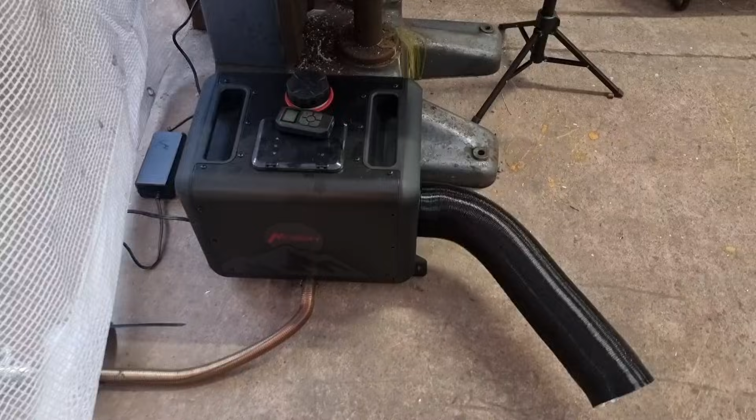Time for another Banggood Hcalory diesel heater review. Regular readers will see that I have received, reviewed and installed the toolbox Hcalory toolbox. I think it's their biggest, top of the line, all bells and whistles, comes with an app. You can remove the control panel and have it mounted on an extension cord remotely. And all that, and it is absolutely on point.

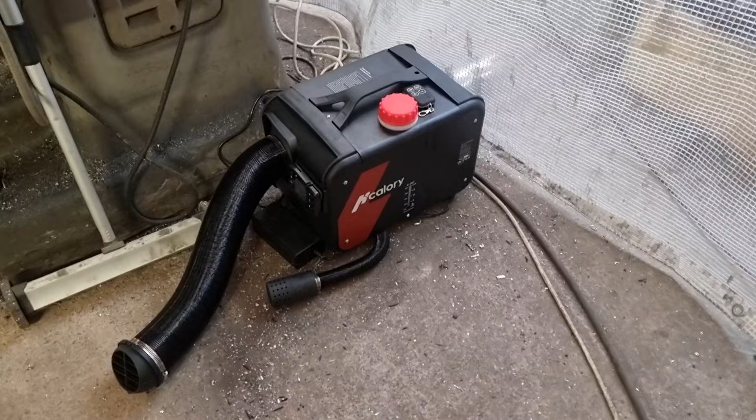Shortly after receiving and reviewing that, they reached out again and sent me its little baby cousin or brother or sister, the smaller one, the next one down. There are a few differences, but nothing major. Let's run through what you get, how you set it up, and how well it works.

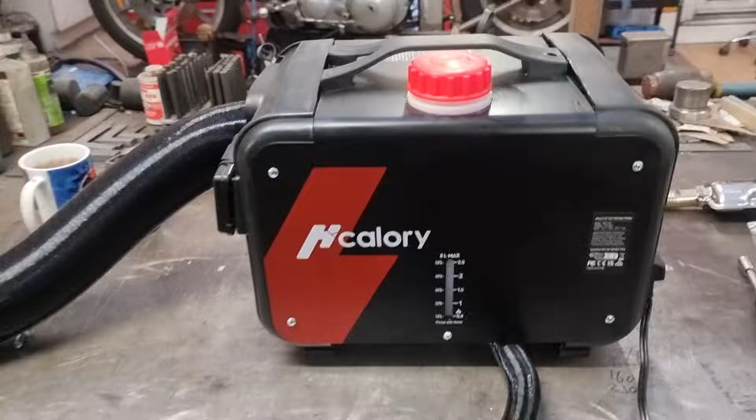I'm not going to do an unboxing because I've been using it and testing it out, and I didn't film the unboxing because it's just me taking this out of a box. When it comes, you will get the unit itself.

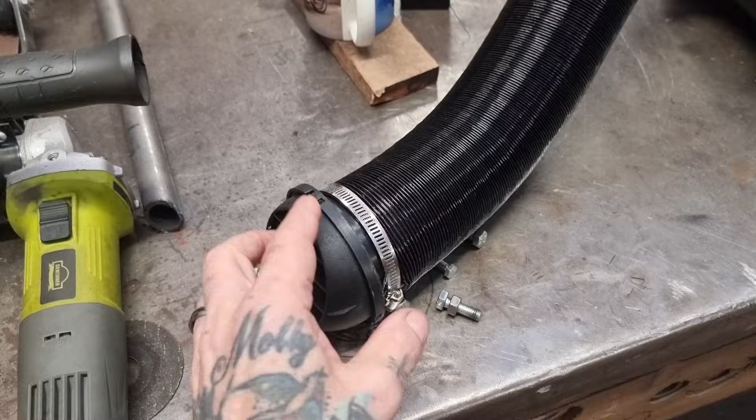There are 3 connections you need to make. One is the outlet, and you get the Jubilee clip for that, and you can direct this where you want. If you're running the unit outdoors, which you can do because it's fully waterproof, apparently - I don't run it outdoors, but it's fully waterproof - you can run this to a vent in the side of your van or your shed or your workshop or wherever, and then have the outlet blowing hot air out.

One is the air intake, which again comes with clips so you can clip it on. And the third one is the exhaust. I'll show you underneath, bear with. Let me just tip it up. So you get the 2 connectors that you need to make underneath.

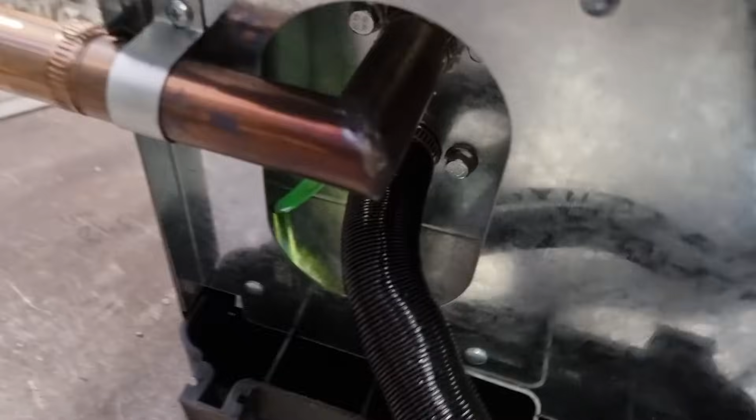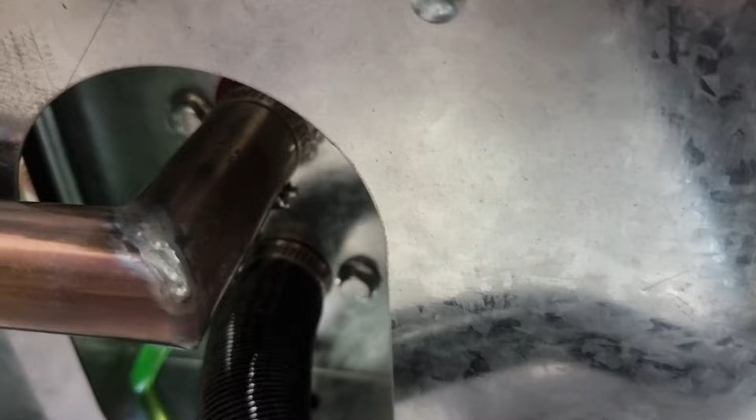Now this bottom one, the exhaust one, was not very tight after I'd tightened the clip up that you can't see very well, so I used a bit of exhaust paste on it - this stuff. I think that's really important if you're not running it outdoors. If you are, then not so important because the exhaust gases will just blow away.

The other one, the air one, just push it on, clamp it up, and it draws its clean air in for the combustion chamber through this tube, which again you should really run outside so it's not creating negative pressure in your workspace and drawing cold air in, but that doesn't apply to me. Honestly, that took 5 minutes, if that.

You get little feet to put on it, which I have put on it. They just clip into place and then screw up. And you get a 12-volt power supply, much like the other one, so you can run it on mains power.

Ignore the snake's wedding. You also get the remote control, ready to rock and roll. I believe, well I know, it's got a little round watch battery type thing in it. It's not rechargeable like it is on its big brother, that's USB rechargeable. This is not, but it controls the unit perfectly.

You also get an extension cable, a power cable, so you can run it off a 12-volt supply - that's in your vehicle or a separate battery that you recharge as needed, if you've not got access to 240-volt because you're running it in a vehicle or you've not got it where you are.

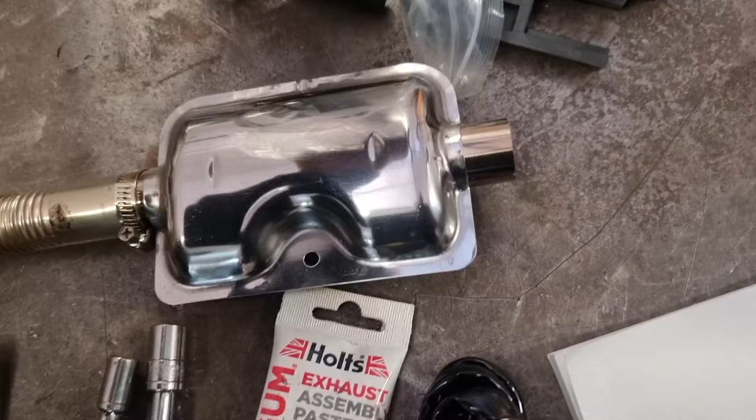And you get a few other bits and bobs that could be useful, could not, depending on where you're siting it. You get these brackets that shove on where I've put those little feet, and then you can bolt it down to a deck or a surface or a shelf or a wall or whatever you're doing with it.

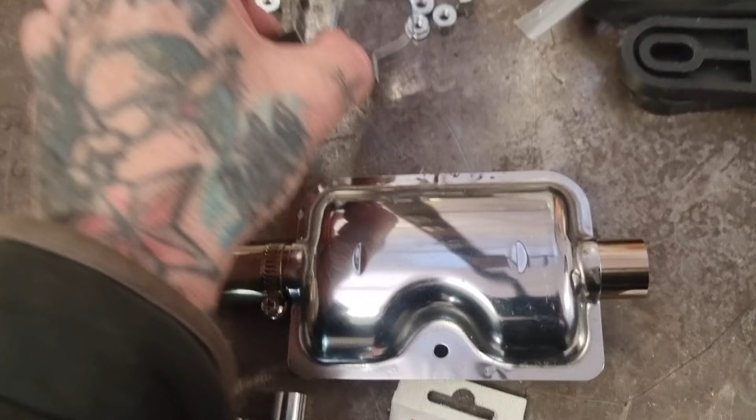Via these bolts, you get a few other bits and bobs. You get extra bits for the pipe work, the ones I've just shown you, so you can clamp that up away from a surface because it gets ridiculously warm. Bear that in mind.

Some people salvage the heat from the exhaust. Not something I've bothered to do. For my application, I just want rid of the noxious gases and the job's a fish. But you can clamp this to the side of the wall or wherever it's running to make sure that it's not getting near anything combustible or damageable.

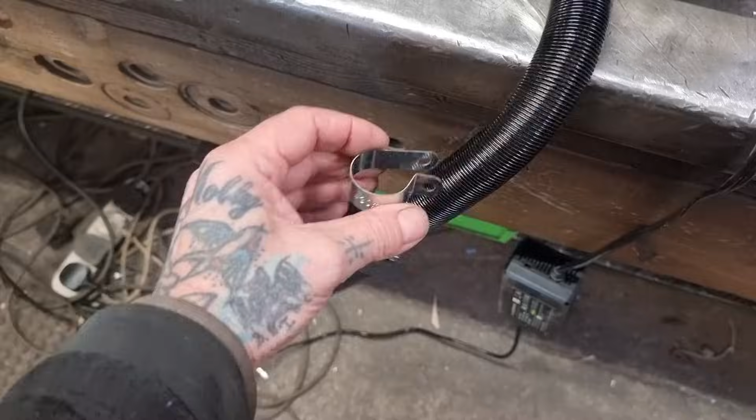And the same with the air intake. You get a clip for the air intake, so you can route this where you want it. You can stand it up there and it will all be happy days.

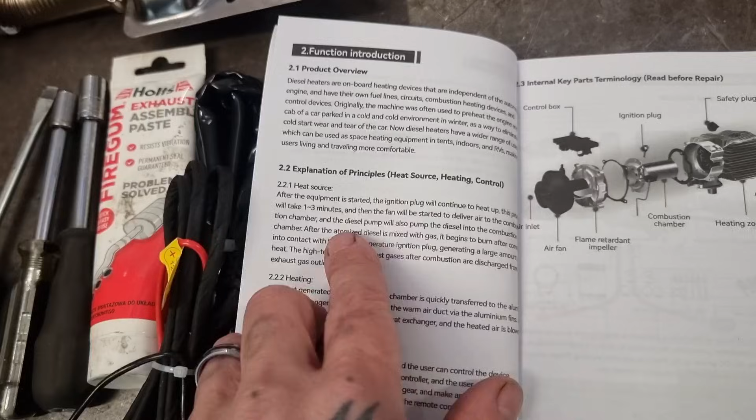And of course you get a really thick manual. Now it's in lots of languages, so the English section is nowhere near as thick as the book would suggest. To be fair, I've not read it because it is so simple to use. This is the first time I've looked at it. So it explains what the thing is and how it works, and it gives you an exploded view of the heart of the beast, the actual burner and the heating bit.

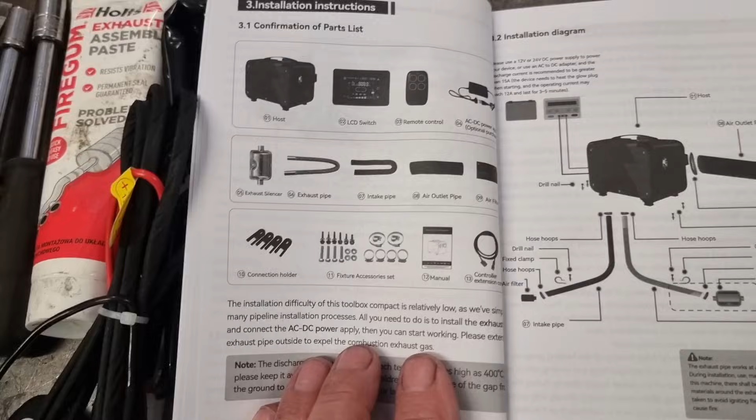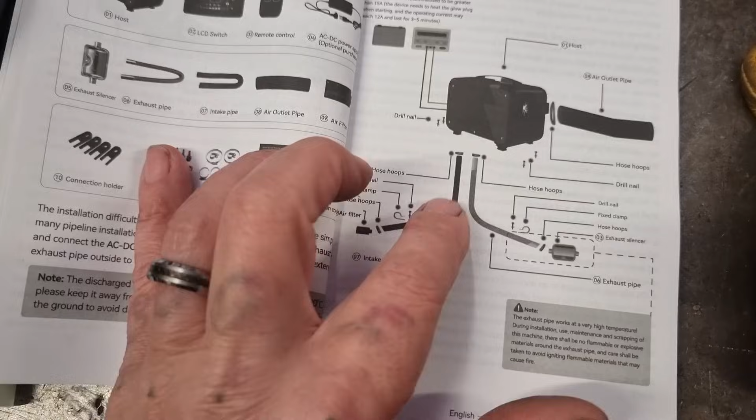You get a list of the parts that you should have received when you opened it, which I did. I got everything there, and then it shows you those connections that you need to make. You need to be sure that you don't get these mixed up, because that would be a bad day. You would burn the intake if you tried to run the exhaust through it. It is only a thin aluminium flexi pipe, and it'd last about a minute. So be aware of that.

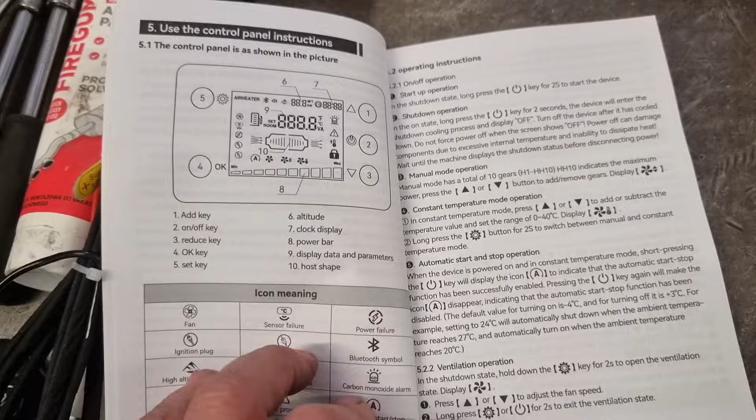And then you get a bit of safety stuff and the basic instructions about how to use the control panel and all the rest of it. Honestly, it is so simple, it's just a breeze.

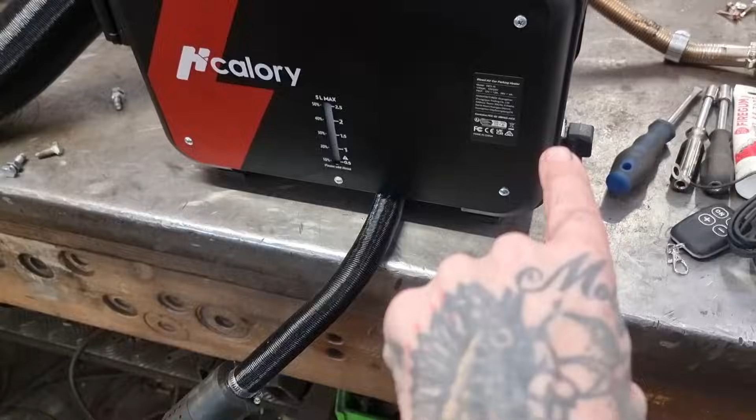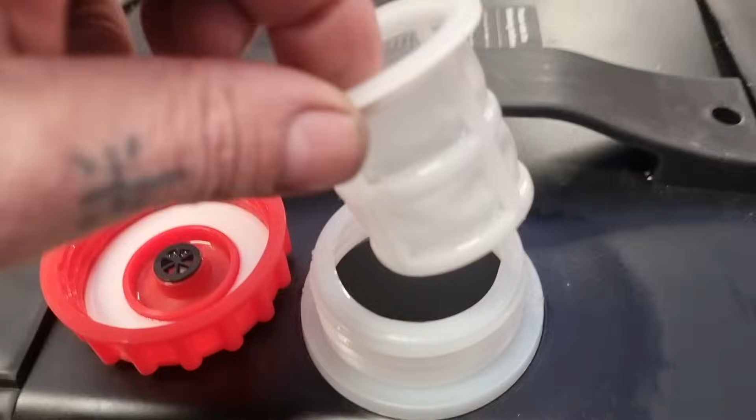All I did was connect the 3 hoses as I've just shown, plug it in, plug that in the outlet, so you're running electricity to it, and then it says 5 litre max, and I've got 5 litres in it now, but it only indicates from half full down, so bear in mind with that. It's got a massive fill port, so you can use your jerry can like I did and not splosh it too much. And it's got a handy dandy filter in there to stop you getting any debris in which might clog the fuel pump, which would be an inconvenience.

So connect your 3 hoses, plug it in, put fuel in it, site it where you want it. I'm going to run it up on the bench. Use your remote. Now, it is this simple. Press on, watch that control panel. So we'll press on.

It starts to fire up. Yep, there's the fans running, but it's not actually burning yet. It has to go through a very, very quick, I think it's a 4-minute start cycle before it actually starts burning properly and producing heat out of the outlet. But we'll keep an eye on the exhaust once it gets running, and I will show you how clean this thing runs.

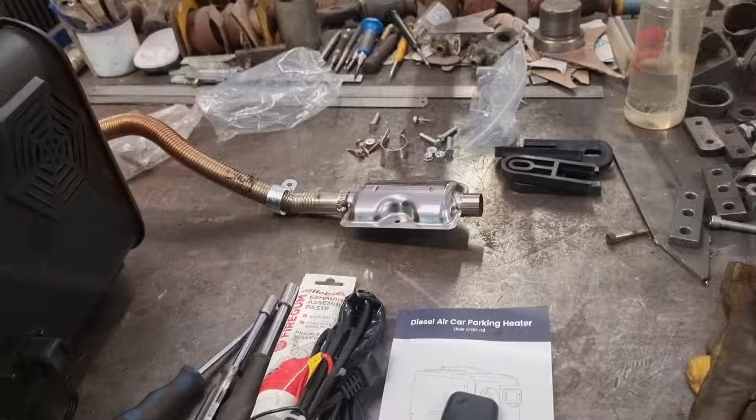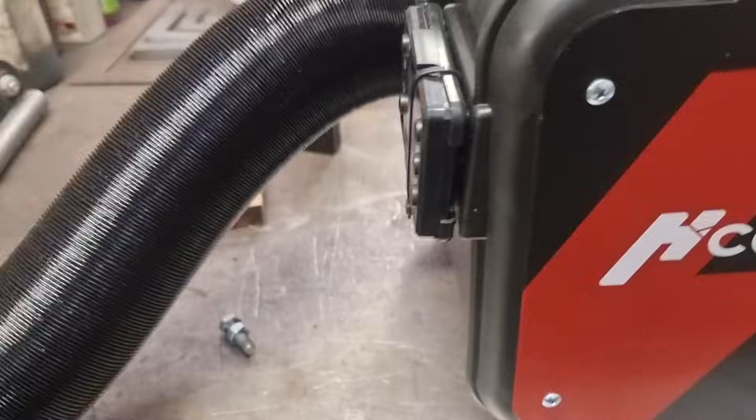Okay, now one of the critiques of these, especially the earlier ones, was how loud the fuel pump was. Now it's priming itself, getting ready to fire up now, so you can hear the fuel pump clicking. They use a diaphragm pump, and I think it started. I think it's firing up. It's not actually burning just yet.

But trust me, I've got my hearing aids in, and that ain't that loud. If I stand back a bit, it's not a problem. You could have that in your shed, in your workshop. It won't be too bad. It's not irritating, annoying, or invasive in any way whatsoever. And once it's up to temperature and running, then it barely clicks because it don't use a lot of fuel. Now, if you notice, it has actually started firing up.

Sounds like a little jet engine, but again, it's not very loud. If it was loud, I'd say. And that is just starting to come through a little bit warm, so it is now burning fuel.

And if we look at the exhaust, nothing. Just nothing. No smoke, no steam, no anything. Obviously there's carbon monoxide. I've got a monitor on the bench there, and the Big Brother comes with a monitor built in, so that might kick off because I'm running it right next to it. Not the best idea, but that's it going at full chat. And it is cleaner than Julie Andrews' memoirs. That is nothing coming out of there that's going to give you any worry, apart from the poison gas that you can't smell or see.

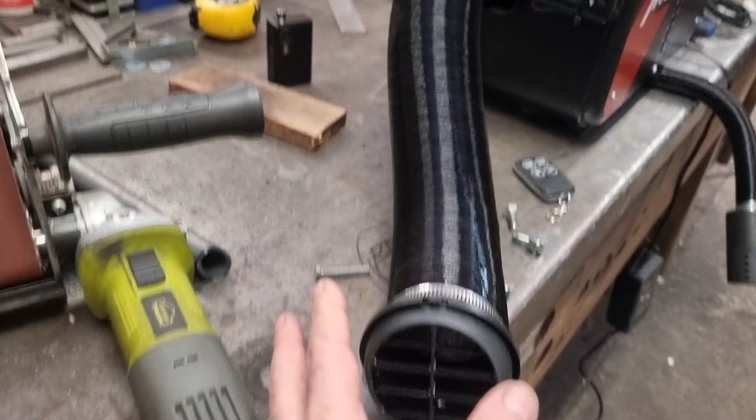And there you go, that is now running. Not quite red hot, it's certainly warming up. And looking at the timer on this video, this has been running for about 2 minutes. Right, we're another 30 seconds, maybe a minute max, and that's doing it. That is delivering the goods. So total startup time from cold to kicking out hot air is probably 4 minutes maximum.

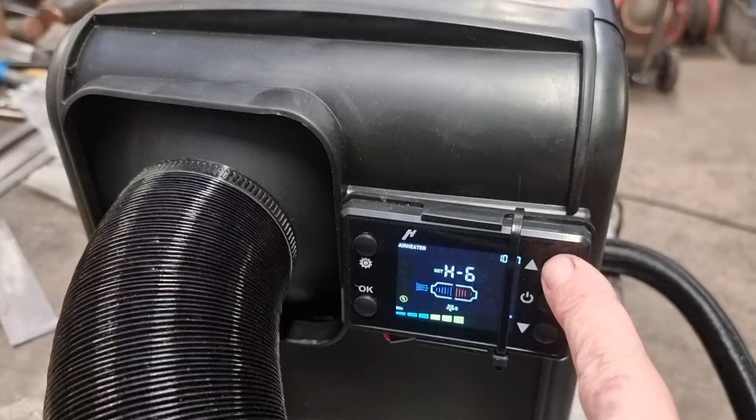There's a couple of ways that you can set it to run. Okay, so you've got manual, which we've got now, and you just turn it up or down using these buttons, the up and down buttons, or the same buttons on the remote. Look, I'll just turn that down, 7, 6, etc.

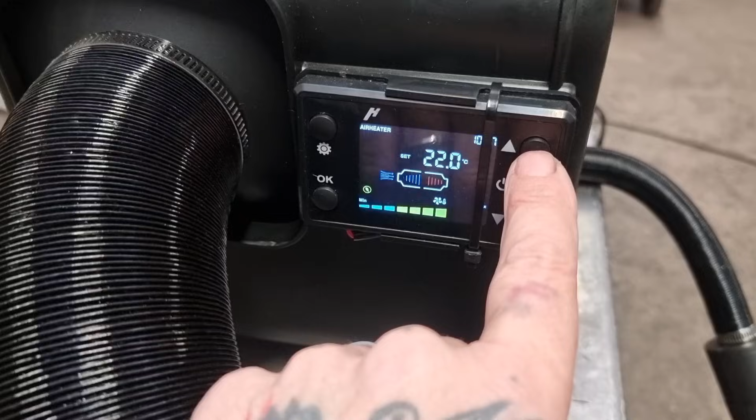Yep, no problem. What you can also do, because this unit, remember, you can mount it remotely in your room if this is outside. This control panel monitors the ambient temperature. So if you press and hold the gear button, it should shift it into ambient temperature mode. Again, using the up and down either on here or the remote, you set it to the room temperature that you desire, and it will go into low mode when it reaches it and high mode when it's not.

So there it is in full hammer. It is absolutely the cleanest running, apart from it's that big one over there. I had no idea that these things ran so clean. I'm not going to run it for very long in my enclosed workshop because I don't want to fall over. Safety is of the utmost importance when you're burning diesel as a fuel.

Okay, so to shut it off, if you want to shut it off, again, it couldn't be easier. You've got a big off button, yeah, or you press this button and hold it for a couple of seconds, like so, and there it goes into off mode. Now, because the element inside is still really hot, it's not going to just shut off. It has to run through a cycle. The fan keeps running until it cools down enough, and then it'll put itself properly to sleep.

Speaking of which, you can also have it in vent mode when it's turned off. If you press and hold that button, hold on, let me just check the instructions. Right, my bad, it's still closing down, look, it's still showing you that it's closing down. We'll wait for it to go fully to sleep, and I'll show you the second function.

It doesn't only blow hot air, you can have it purely as ventilation. It's quite a powerful little fan in there, so you can have it running without burning fuel, and it blows cold air for when it's hot. Now, I'm not sure if you can use the temperature room ambient setting for the cold air fan, whether the temperature rises above your threshold, it kicks in blowing cold air out or not. And I'm going to struggle to test that because it is cold air today, so I don't know.

But I'll wait until this has finished its cycle, and then I'll show you how to put it into fan only mode. Right, that is actually shut completely off now. It does take about 4 minutes again to close completely to shut down, so I can show you this mode.

There we go. That is now in air, not heat, so it's A, and you can control the fan with your up and down buttons, and it will blow out air as cold as it sucks in. Yeah, I think it will automatically just close down.

There are also screen brightness adjustments within this, and a clock and a timer.

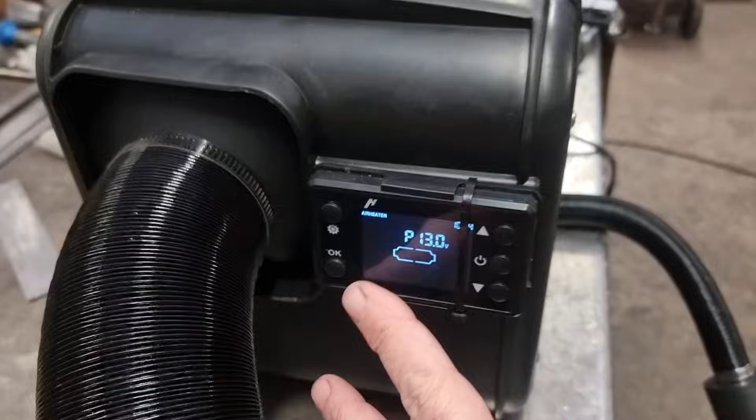Hold on, bear with me, there's an app, look, Hcalory app. Stop checking my home screen out. There we go. So when you get on the app, you can control it all.

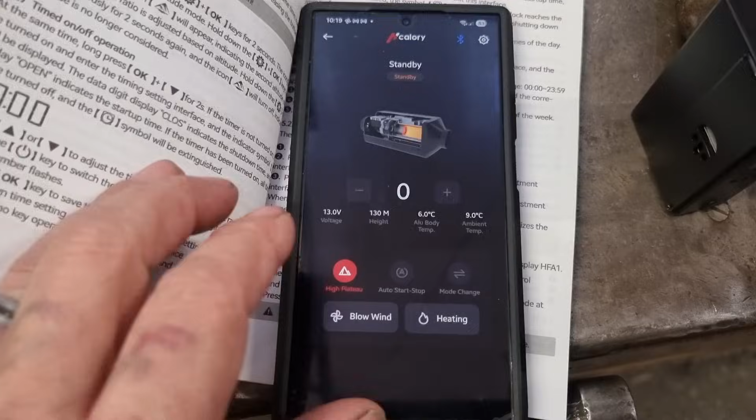You can blow wind, you can go into heating, and you can activate the device.

Oh, that's not a good one. It's done that one, look. I've connected to the wrong one. Hold on, let me just connect to the other one. See if I can get out of here. Right, that's the problem with having two. So we can't do that. We'll disconnect from the other one. Look, it's in standby. We've connected to that one.

We can blow wind, we can heating, and now this one should fire up. Hopefully, there you go. If you can hear it, that's fired up through the app. And there's lots more settings and controls within the app.

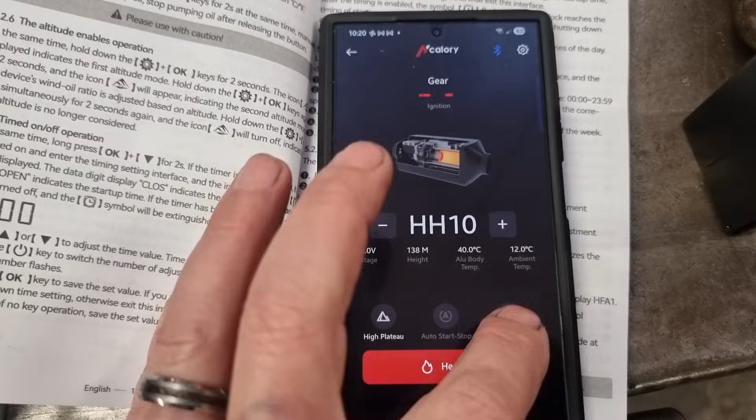Though you can absolutely use your phone, you can turn it up and down, you can put it into blow mode, you can do all sorts through the app itself.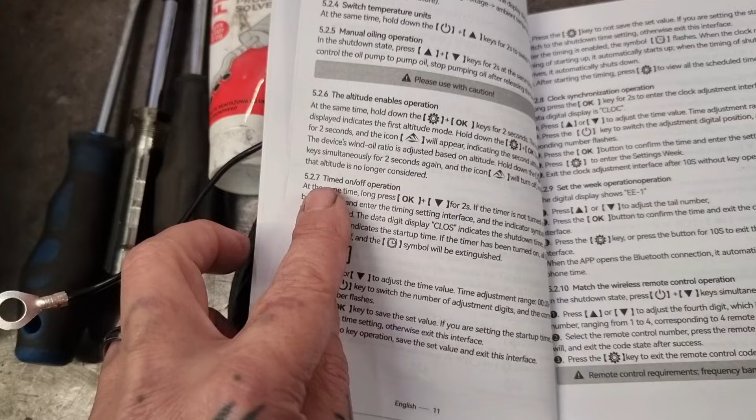Also, via that screen, you can set a timer. Look, there's a timed operation, so you can have it run for an hour or two, or however long you want. If you're getting down in your van and going to sleep, you can set it to run for 30 minutes until you nod off, finish watching me on YouTube, and it's tomorrow morning.

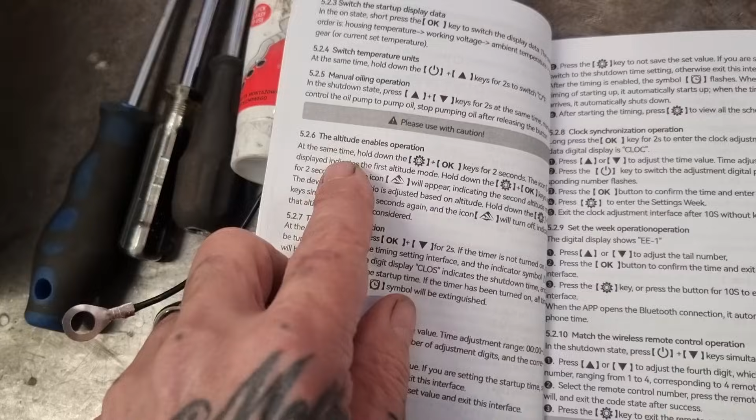It also has an altitude setting where it will automatically richen if you're up a mountain. Now, where I live, there's not many mountains, so we don't need to worry too much about that. But it just shows that it is a very versatile bit of kit.

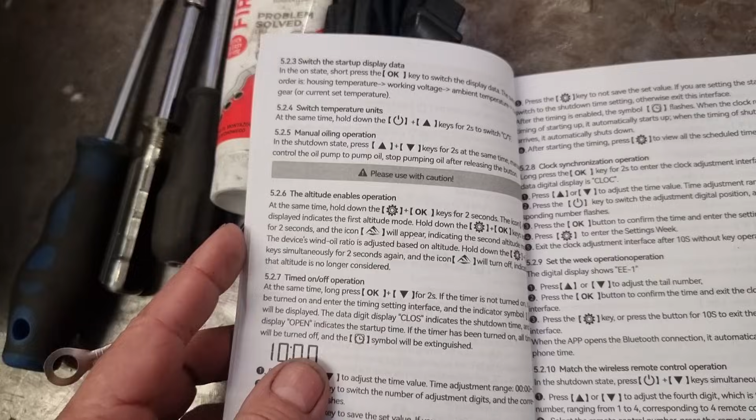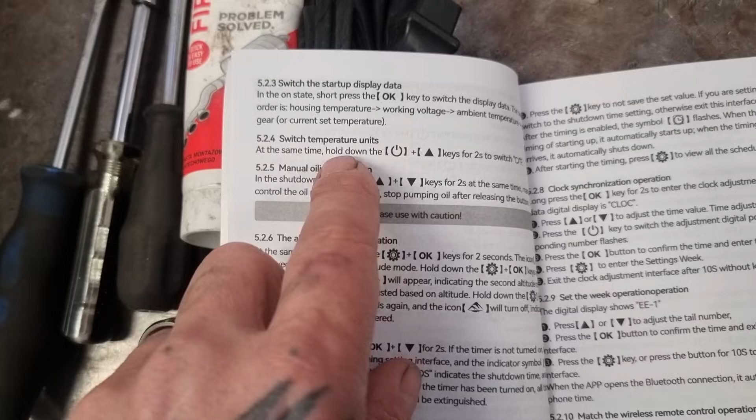One last thing as well to point out, or two, is that you can change it from Celsius to Fahrenheit if you're running bananas and not proper units. And manual oiling is for priming the fuel pump.

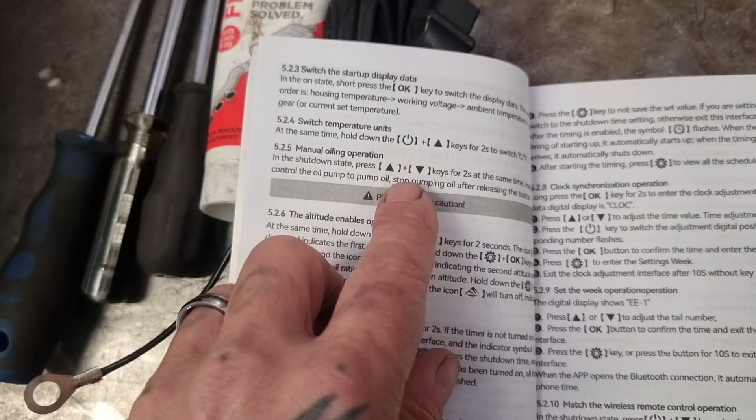So if you run it dry and it shuts off, it does auto prime. I have run it dry and it shut off, and then I've filled it back up and it just starts. But if it doesn't, then you can press up and down at the same time and that pump that you can hear ticking now will kick in and the job's a good'un.

So there you go, I think that's covered it. I'll try and link to my other one because it is just its baby brother, my other review on this product.